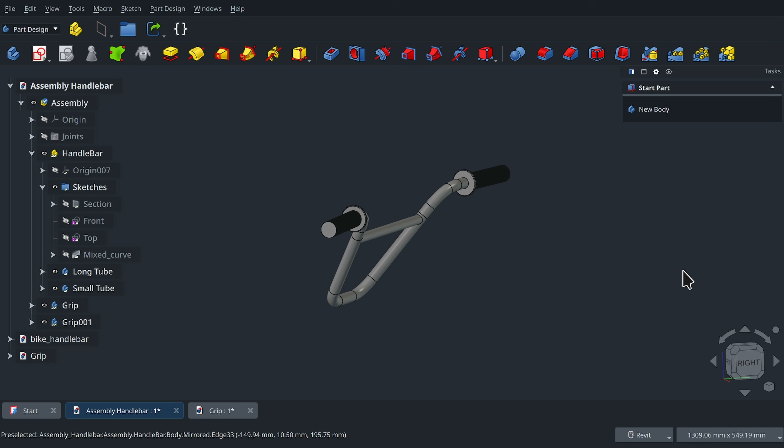In this video, I will show you how to make this bike handle and an easy assembly with the grips. At first glance, the modeling seems simple, but don't be fooled. It's actually more complex. I've made a short animation to show you why.

The main operation we're going to use is an additive pipe for the long tube and a pad extrusion for the center tube. The tricky part comes from defining the path for this operation. As you can see, the handlebar has a back sweep. This means the path doesn't lie on a single plane, which is what creates the challenge here.

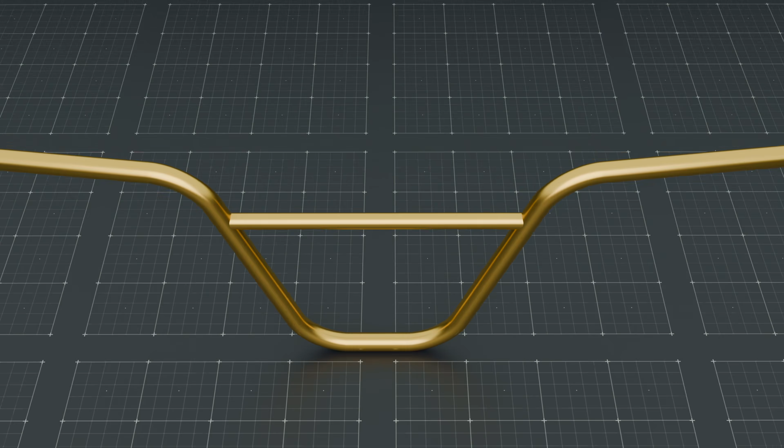I briefly mentioned this issue in one of my previous videos, but that video wasn't very informative and it went too fast to properly explain how to create this model. This time we're going to take the time to go through everything clearly, and I'll show you several different methods.

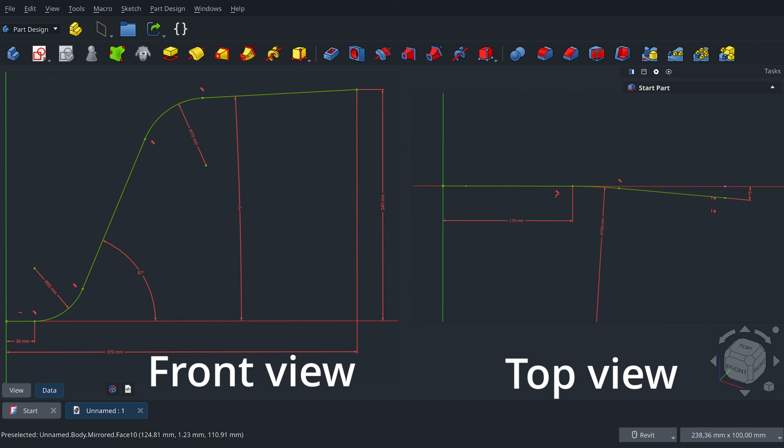The second sketch on the right corresponds to the top view, and it's what defines the back sweep. The goal here is to combine these two sketches to get a 3D path, almost like they had a baby together. To create this monstrosity, we're going to switch to the Sketcher workbench. To do that, go to the drop-down menu and select Sketcher.

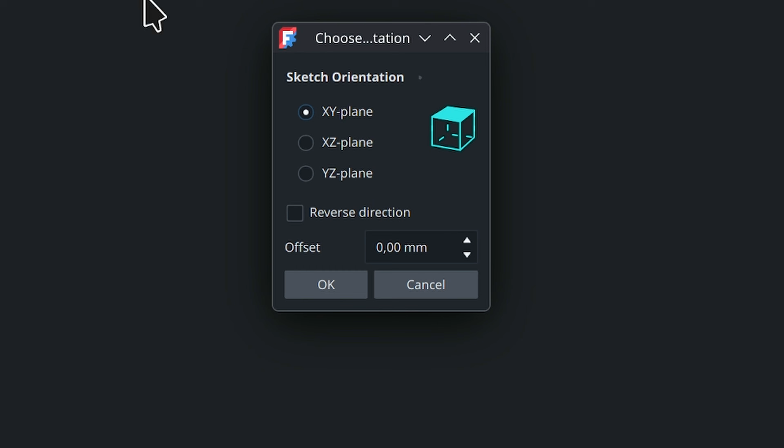We'll start by creating the sketch that represents the front view. To do that, click on the Create Sketch tool in the toolbar. In the pop-up window that appears, FreeCAD asks us to choose a sketch orientation. Since we want to create a front sketch, we can choose either the XZ plane or the YZ plane. The XY plane corresponds to a top view, which is definitely not what we want.

Here I'm going to select the XZ plane and then click OK to start sketching. The view automatically adjusts to place you perpendicular to the XZ plane to make sketching easier for you. To create our sketch, we're only going to use one tool, the polyline, which is extremely powerful. It's basically the Mewtwo of sketching tools. With it, we'll be able to create multiple segments with different shapes. Go ahead and select it from the toolbar.

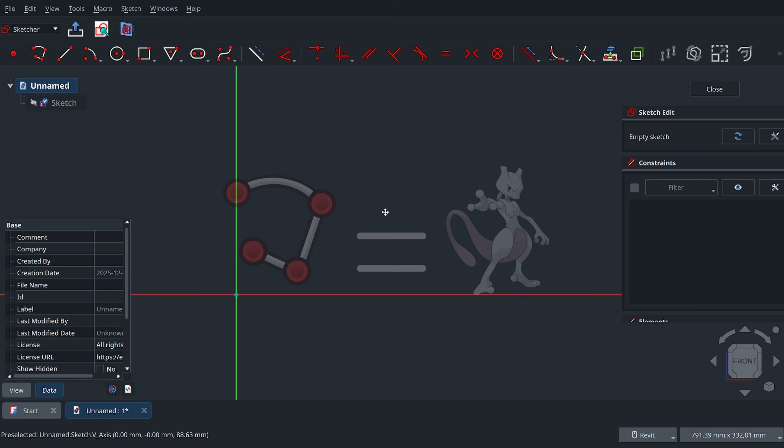Place the first point on the origin of the axis. You should see the coincidence constraint appear as a small cross. When it shows up, click to place the point. Then move to the right to draw a horizontal line. You should also see the horizontal constraint appear, and then place the second point.

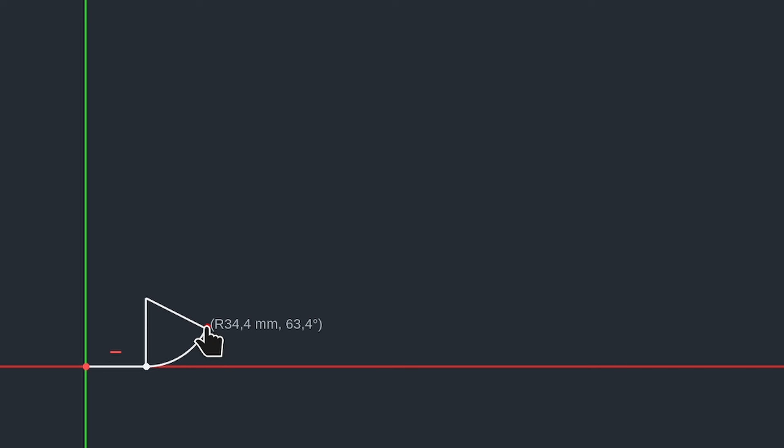On the sketch I showed you at the beginning, you can see that there's an arc in this area. To create it automatically using the polyline tool, we need to press the M key 3 times to switch to the arc mode. You can then place a third point. The great thing is that the tangency constraint is automatically created between the arc and the lines around it. Create a fourth point to finish the rising line.

At this intersection, we need to create another arc. If you paid attention the first time, this should be a piece of cake. Press the M key 3 times, then place the fifth point. Finally, finish the sketch by placing a sixth point anywhere you like. To stop using the tool, right-click or press Escape, otherwise you'll end up with a mama's boy that won't let go of the cord. Great, we have the shape, but it's not constrained at all.

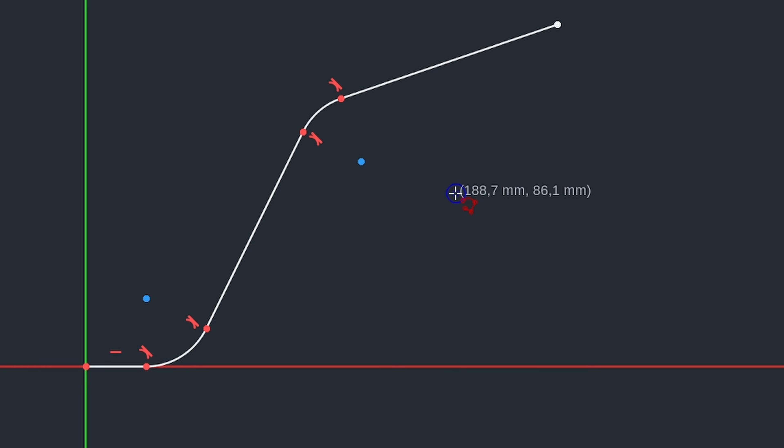To fix that, we're going to use the Dimension tool. By the way, doesn't this tool look like the big eye that the physics teachers draw on their diagrams to explain distance calculations? Or was I the only one traumatized by that?

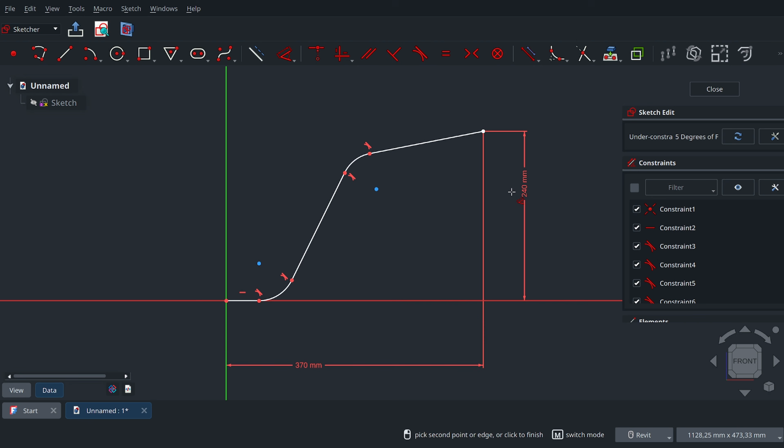Anyway, select the tool, then create a horizontal dimension between the rightmost point and the green axis, and set it to 370 millimeters. For the same point, also create a vertical dimension relative to the red axis, and set it to 240 millimeters. Now we're going to define the upsweep, which is the angle between the top straight line and the red axis. We'll set it to 3 degrees.

Don't mind the angle notation, it's trying to be fancy and went off to the other side of the map. Still using the Dimension tool, we'll set the radius of the top arc to 70 millimeters, and for the bottom arc, we'll set it to 55 millimeters.

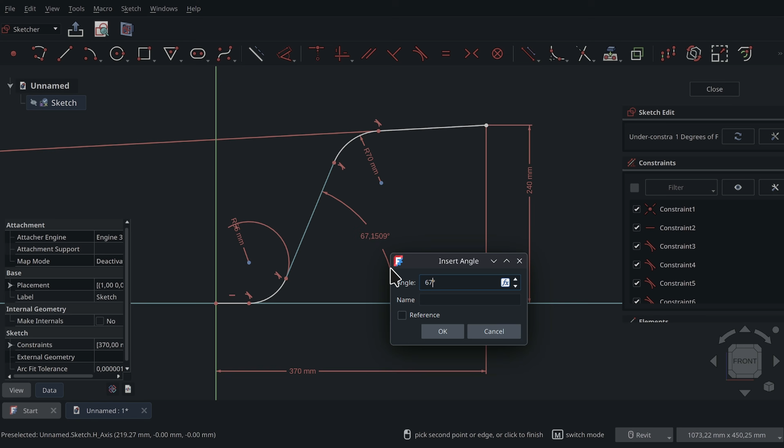Next, we'll set an angle between the straight line and the red axis and give it a value of 67 degrees. Then we'll finish by setting a horizontal dimension of 30 millimeters for the small line at the bottom. You can right-click to stop using the tool.

Now let's go find our dimension that ran away, just like Michael Scofield escaping from Prison Break, and bring it back closer to our sketch. Everything is green, which means our sketch is fully constrained. We can now exit it by clicking the Close button.

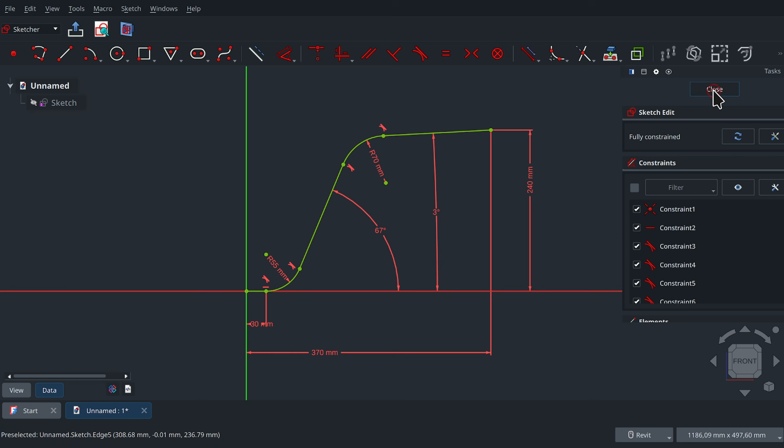Next, to keep our file organized, go to the tree view, select the sketch, and press F2 to rename it to Front. Now we'll create the second sketch, which is the top view. We'll use the same method. Start by clicking the Create a New Sketch tool in the toolbar.

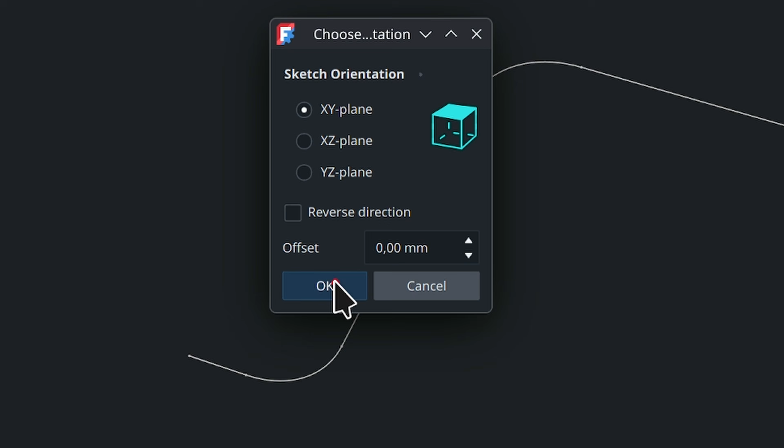This time, in the window that opens, keep the XY plane selected because we want our sketch on the top plane. Then click OK. Here we need to be very careful where we place our sketch, because it has to be perfectly aligned with the previous one. The starting point is easy to find since it matches the origin, but the ending point is not.

By default, FreeCAD turns on the Section View tool, which hides objects that might get in the way. But here we need to see the previous sketch, so click the Section View tool in the top menu to turn it off. You should now see the previous sketch in the viewport. Rotate the view a little and locate the point on the far right. We need it to constrain our sketch.

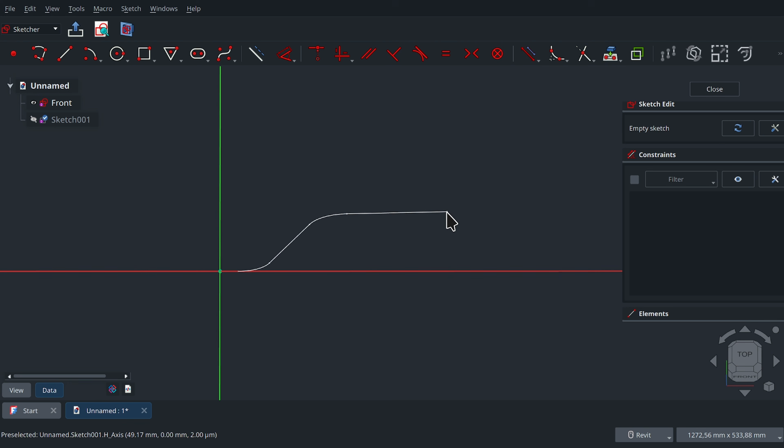To do that, select the Geometry Projection tool, then click the point on the far right of the previous sketch. You should now see a purple point on the red axis. That's the projected point. Next, realign the view by clicking top on the navigation cube, then click the Section View tool again to hide the previous sketch.

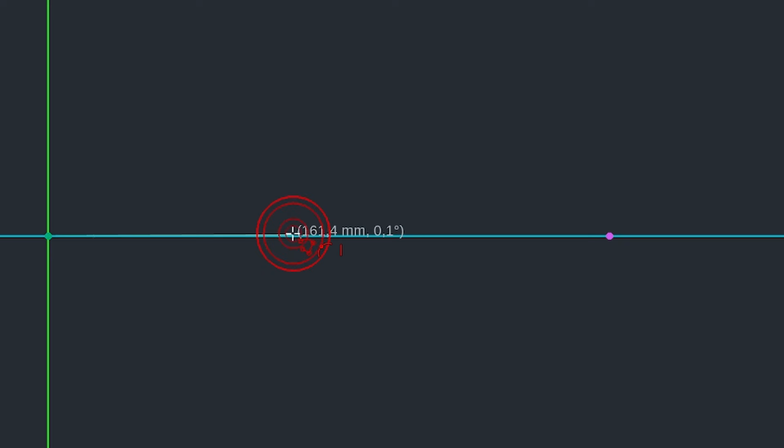Just like the previous one, we'll use the Polyline tool to draw our sketch. Start by clicking once on the origin. Then draw a horizontal line along the red axis and place a second point. I don't know if you remember, but there should be an arc here. Press M 3 times to activate the arc tool, then place the third point. Finally, create one last point below the purple point and right-click to stop using the tool.

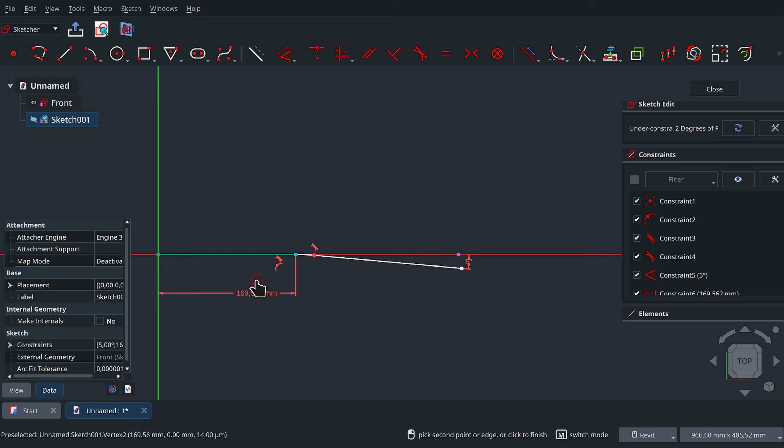Now let's constrain the sketch. Select the Dimension tool, create the back sweep angle between the red axis and the line on the right, and set it to 5 degrees. Next, set a horizontal length for the line on the far left and make it 170 mm. Still using the Dimension tool, set a radius of 700 mm for the arc.

The only thing left to fully constrain the sketch is to align the point on the far right with the purple point. Select both points, then use the Vertical Constraint tool to align them. This fully constrains the sketch, so we can now exit it. To keep the file organized, go to the Tree View and press F2 to rename the sketch to Top.

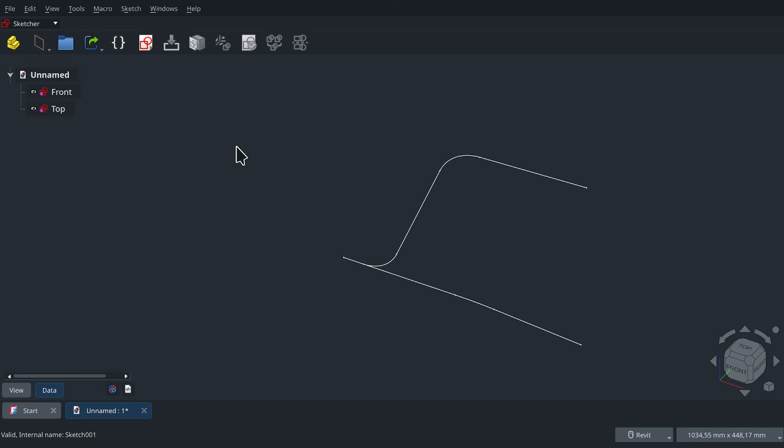Now we'll create our 3D path by combining the two sketches. I'll show you two methods so you can choose the one that works best for you. For the first method, we need to go to the Part workbench. To do this, select Part from the Workbench drop-down menu. Let's start by creating a new folder to group our sketches. This makes it easier to access them when used in operations, without having to expand all the operations to find the sketches. Select the two sketches, then drag and drop them into the new folder.

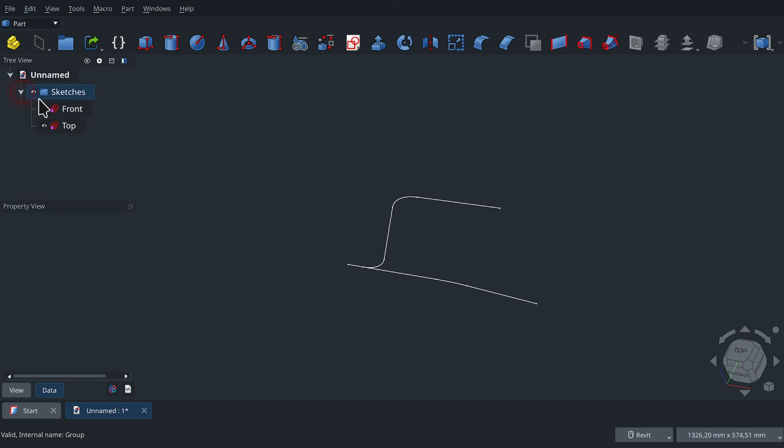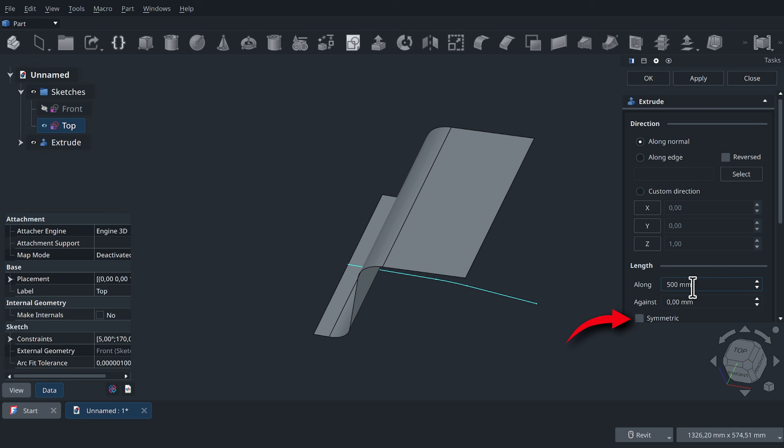To get the intersection between the two curves, we'll extrude each one along its sketch plane. Start by selecting the front sketch, then click the Extrude tool. In the window that opens on the right, set length along to a large value like 300, check the symmetric box and click OK to confirm. We'll do the exact same thing for the top sketch. Select it, then click the Extrude tool. In the menu on the right, enter a value of 500. Make sure Symmetric is checked and click OK to confirm.

The goal here is to get the intersection between the two surfaces to create our 3D path. And you'll see it's very simple. Hold Ctrl, select both extrudes, then click the Section tool in the toolbar. You should now see only the curve on the screen, and you can check that it properly combines both sketches. This method is really the basic way to get 3D sketches in FreeCAD. To keep my file organized, I'll move it into my Sketches folder.

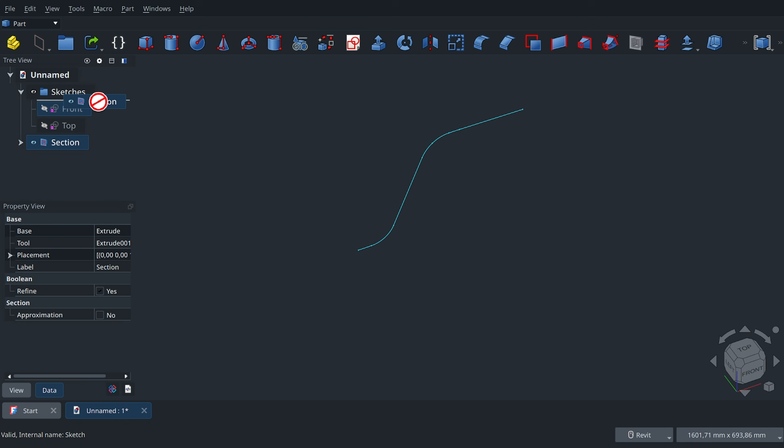Now I'll show you a second method, which I think is more elegant. And it requires fewer steps, because this is a bit like using a rock to hammer a nail with lots of steps, while a hammer would do the job much better. For this second method, we'll use an add-on that isn't installed by default in FreeCAD, and I think it should be. It's called the Curves Workbench. To install it, go to the Tools menu and click on Add-on Manager. In the search field, type Curve, then scroll down and click on Curves Workbench.

Then click Install. Close the window and FreeCAD will ask you to restart to install the workbench. You can click Restart Now. FreeCAD is so great that it asks us to save before restarting, which could have been disastrous if it had closed without saving. So choose a location to save your file, give it the original name like Bike Handlebar and click Save. FreeCAD will restart and bring you to the home page.

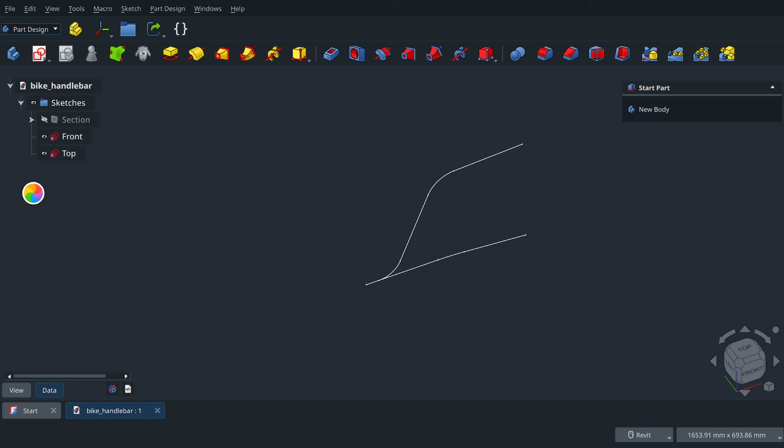You should see your file in Recent Files. Click on it to open. Now, when you open the Workbench drop-down menu, you should see the Curves Workbench. Click on it to access it. The tool we need here to project the sketches onto each other and get our 3D path is the Mixed Curve tool. To use it, hold Ctrl, select both sketches and then click the tool.

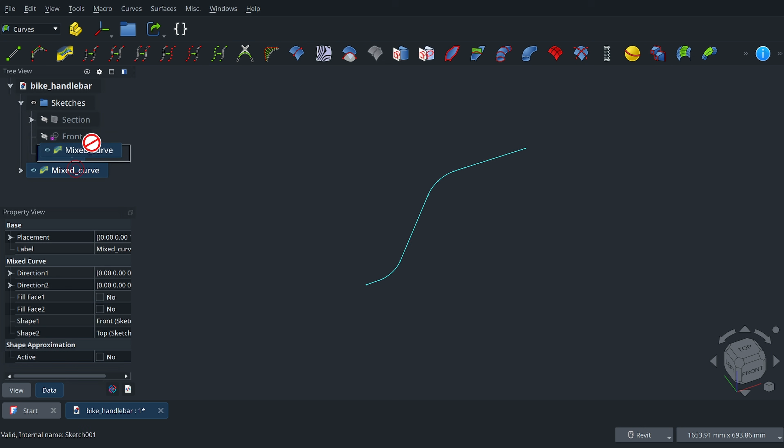In the viewport, you should see the mixed curve appear. It's the same result as the first method, but here we didn't need to extrude the sketches. In the Tree View, drag and drop the mixed curve into the Sketches folder to keep the file organized. We can rotate the view a little to see that this curve isn't on the same plane. You can also make the section from the first method visible to check that they match.

Both methods give good results, but I recommend using the second method, the mixed curve. It saves time and you don't need to use any extrusion operations. From here we can return to the classic modeling workflow by going to the Part Design workbench via the drop-down menu. In this workbench, we'll create the additive pipe. This operation consists of extruding a profile along a path. For now, we only have the path, so we'll draw the profile.

Here you can choose either the section or the mixed curve for the path to follow, it doesn't matter. I'll hide the mixed curve and make the section visible. Since we are creating a new solid, we first need to create a body. To do this, click the Create a New Body icon. With the F2 key, we can rename it to Long Tube. It will help to clearly identify the body.

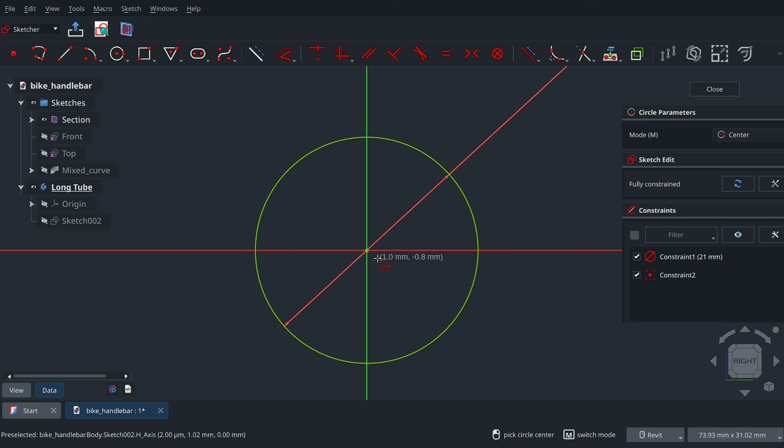Since we did things properly and our path starts at the origin, we can create the profile directly on the YZ plane. To do this, click the Create Sketch icon, then select the YZ plane in the viewport. The profile is very simple, it's just a circle with a thickness. To do this, use the Circle tool from the menu, create a circle exactly at the origin, and set its diameter to 21 mm. Still using the Circle tool, draw a concentric circle, that is with the same origin, and set its diameter to 17 mm. Then you can exit the sketch.

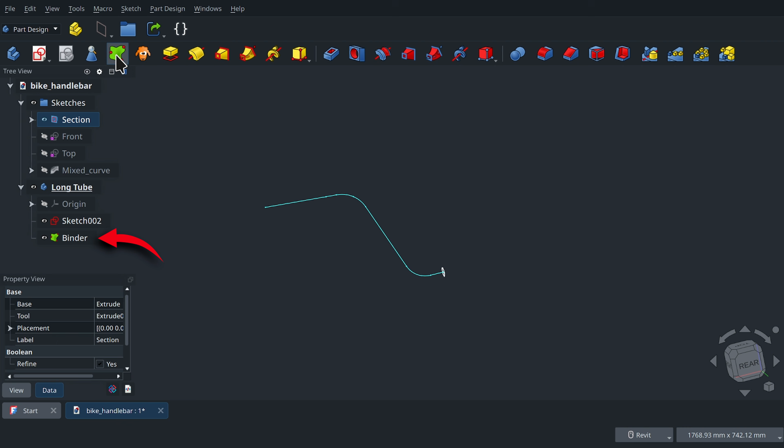Now we have all the ingredients to cook our delicious meal. However, the path isn't in our body, so we need to import it. For that, we'll use our good friend the binder. In the tree view, select the section object, then click the binder tool. You should now see the binder appear inside the long tube object. By hiding the section object, you should see the path in yellow in the viewport.

This is the binder. Now select Sketch 2 in the tree view, then click the Additive Pipe tool in the toolbar. In the menu on the right, under Path to sweep along, click Object and select the binder in the tree view. In the viewport, you should see the operation preview appear in green. Everything looks good, so we can confirm the operation by clicking OK.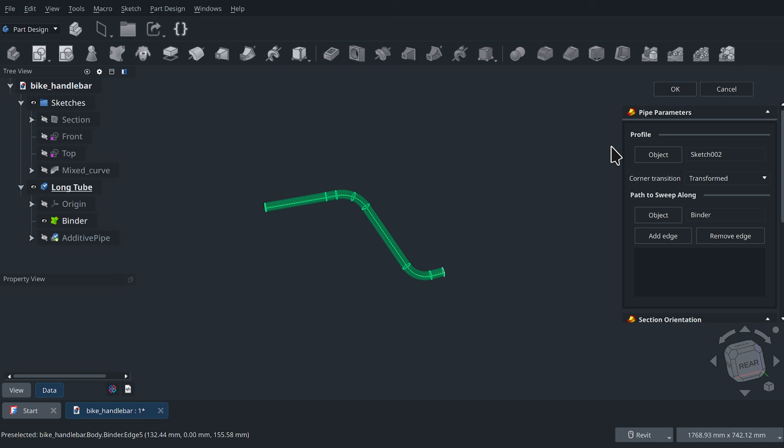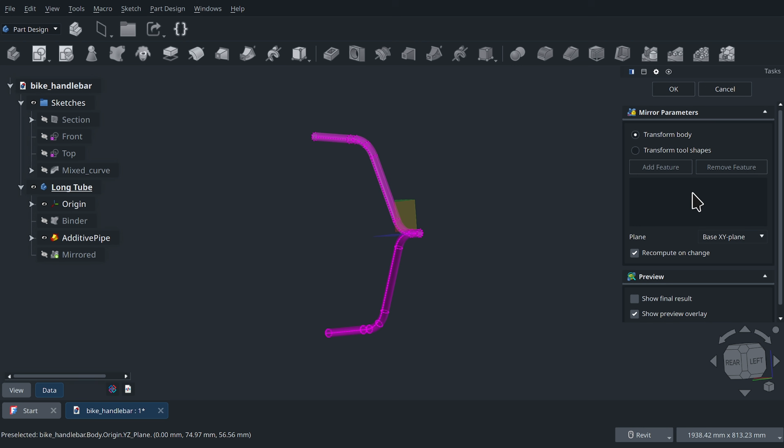For now, our handlebar doesn't look dashing because half is missing. To fix this, select our body in the tree view, then use the mirror tool to create the missing part. In the menu on the right, under the plane parameter, select the YZ plane. If you are confused, the easiest way is to look at the navigation cube to identify the axis. Blue for Z, green for Y, and red for X. So here we can see that the YZ plane is the correct choice. Super! Now our main tube is done.

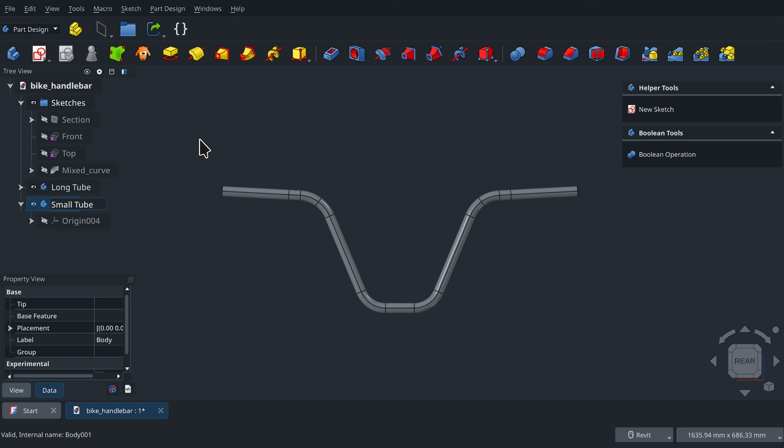Next we need to make the middle tube. Before that, let's rotate our tube a little to see that it's not all on the same plane. Looking from the top view, we can clearly see the back sweep, which is exactly what we want. To create the middle tube, we need to create a new body. To do this, click the Create a New Body icon in the toolbar. Press F2 to rename the body into Small Tube. Since it's just a straight tube, there's nothing complicated. We'll start by creating the tube's profile by clicking the Sketch icon, then choosing the YZ plane as the sketch plane.

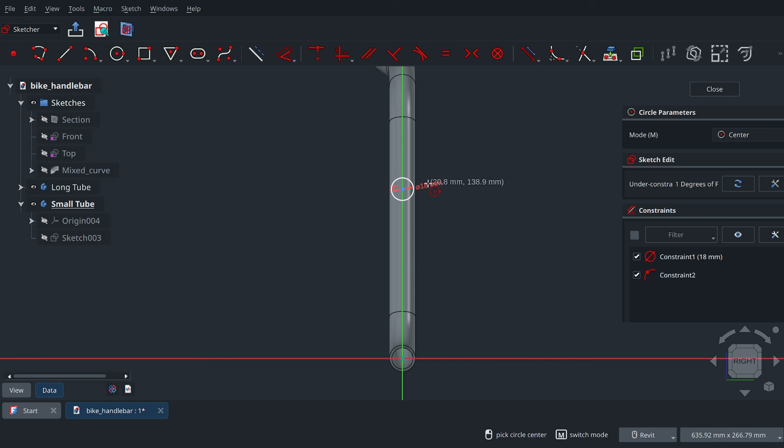Just like for the other tube, we'll use the Circle tool to draw the profile. Place the circle on the green axis and set its diameter to 18 mm. Then create a second concentric circle and set its diameter to 14 mm. Next, select the Dimension tool and set a vertical distance between the center of the circles and the red axis and give a value of 165 mm. Then you can exit the sketch.

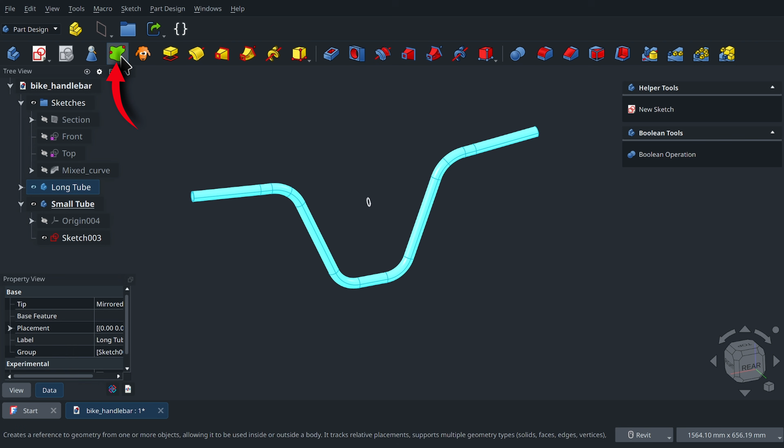The goal now is to extrude this small tube until it reaches the long tube. To do that, we need to import the long tube into the small one. Select the long tube in the tree view, then use the binder tool. You can then hide it, and you should see the binder appear in yellow in the viewport.

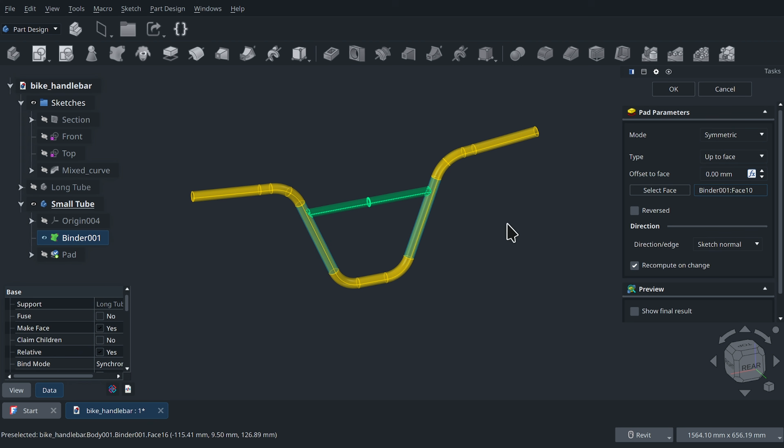Next, select Sketch 3, and in the menu on the right, click the Pad tool. In the type parameter, choose Up to Face, then click the left face of the binder. Right now it only creates half, so to make it symmetric, go to the Mode parameter and set it to Symmetric. You should now see in the viewport that the tube has been created correctly. In the tree view, you can then hide the binder and make the long tube visible again to get a full preview of the handlebar.

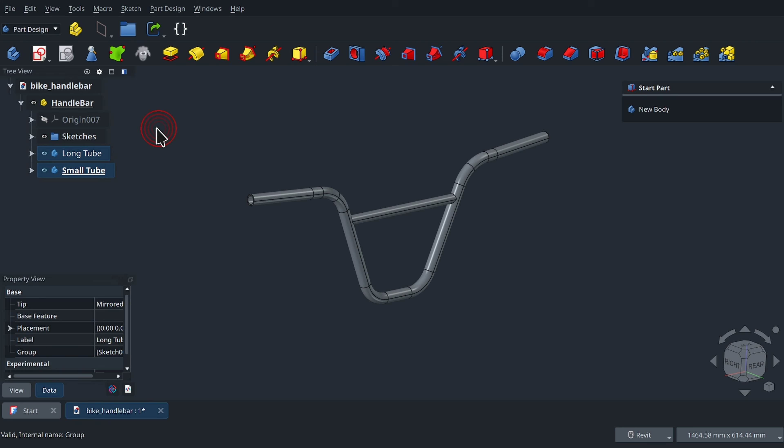If later we want to use this handlebar in an assembly, since it's made of two solids, we need to create a part object. To do this, click the New Part icon in the top toolbar. This object works like a container to store all our solids inside. You can press F2 to rename it handlebar, then just drag and drop all our objects into this container. Now you should have a clean and well-organized file ready to be used later in an assembly.

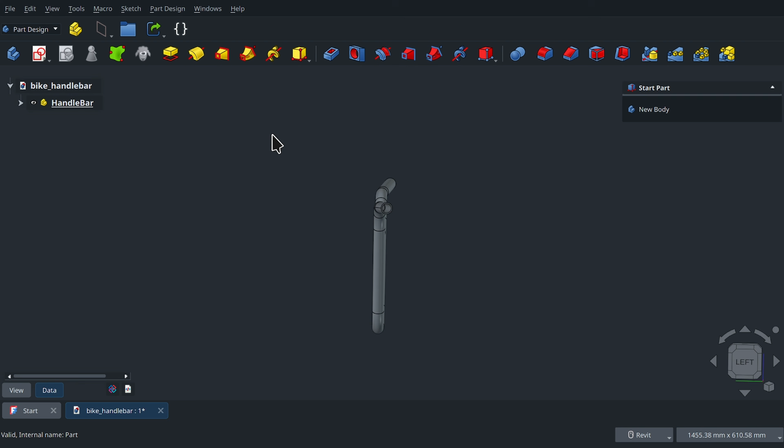Your support is priceless. As a little bonus, I'm going to show you how to create grips and assemble them on the handlebar, so you really get your money's worth. To do this, we'll create a new file. Go to File menu, then click New Document. These grips won't exactly break 3 legs on a duck, as we say in France, but at least they will exist. Making them will be very simple, just a simple revolution followed by an array.

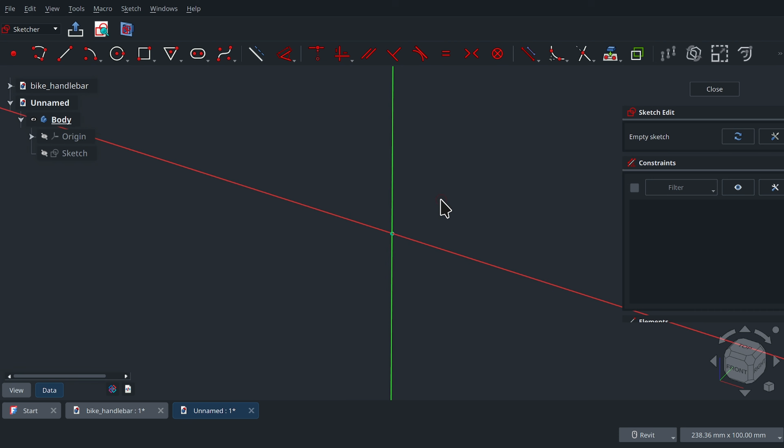To start, create a new sketch and choose the XZ plane as the sketch plane. The goal is to recreate this sketch, nothing too fancy. To do this, we'll use the heavy artillery, the polyline tool. I want to speed up the drawing a bit. We're just recreating the shape with straight lines, so make sure to add horizontal and vertical constraints. You can slow down the video if needed using the player options.

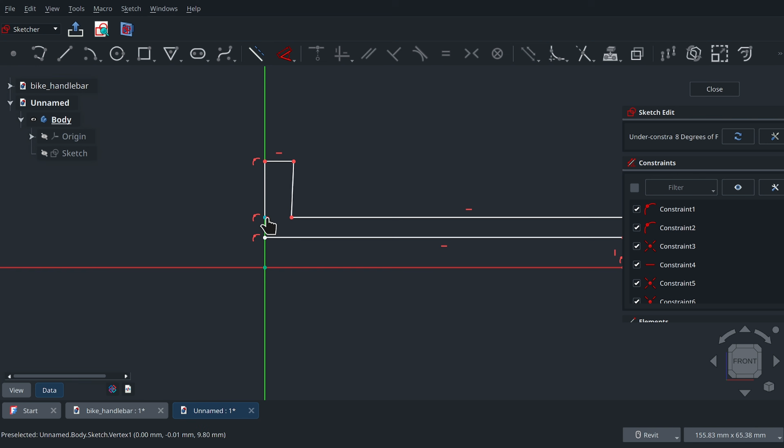But at this point in the video, those of you who are still watching are the cream of the crop, so I don't think the drawing will be too difficult, especially if you've made it this far.

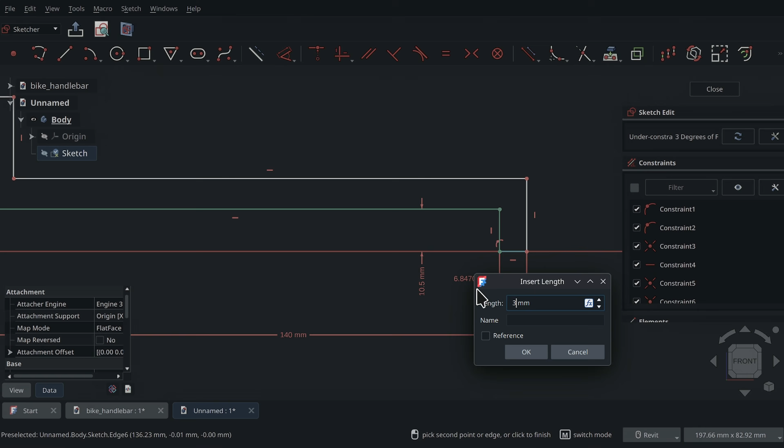To constrain the sketch, we'll use the Dimension tool. Start by setting a horizontal value for the point on the far right and give a dimension of 140 mm. Then, for the small vertical line inside, set the value to half the diameter of the handlebar tube, which is 10.5 mm. Next, set a thickness of 3 mm for the grip at the right end. Also set 3 mm thickness between the two long lines. On the left, set a thickness of 5 mm. For the highest point on the left, set a height of 25 mm. You can then exit the sketch.

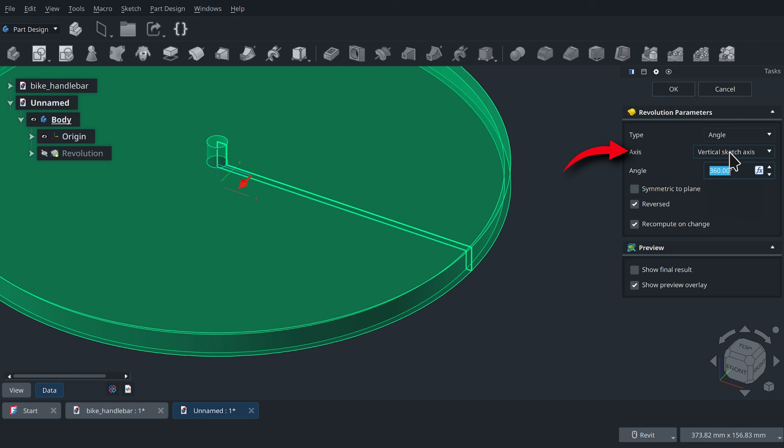To make the revolution, click the Revolve tool in the menu on the right. By default, FreeCAD revolves along the Z-axis, which is completely wrong in our case. Here go to Axis and choose the base X-axis as the axis of revolution, then click OK to confirm. We now have the basic shape of our grip. We'll add fillets on the two right edges. Hold Ctrl, select the two edges, then click the Fillet tool on the right. You can leave the fillet size at 1 mm, then click OK to confirm.

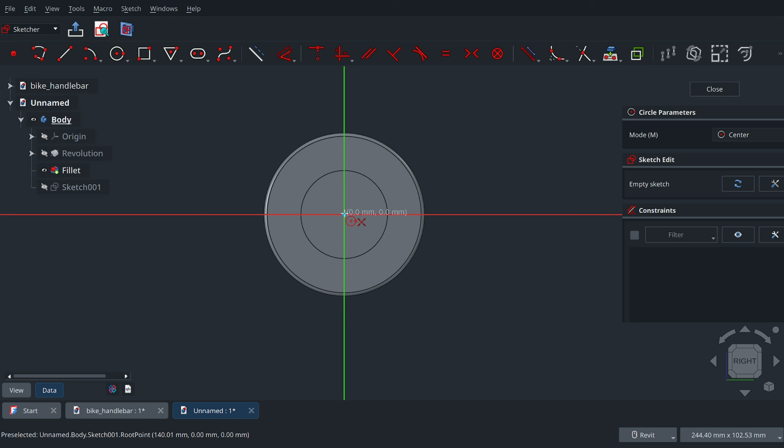Now we'll create the small ribs. To do this, create a sketch on the extreme face of the grip. Select the face, then click the Sketch tool. Using the Circle tool, draw a circle with its center at the origin and set its diameter to 31 mm. If we leave the sketch like this, it would fill the inner hole, which is not what we want. To fix this, use the Projection tool to project the inner circle. The projected circle appears as a construction line.

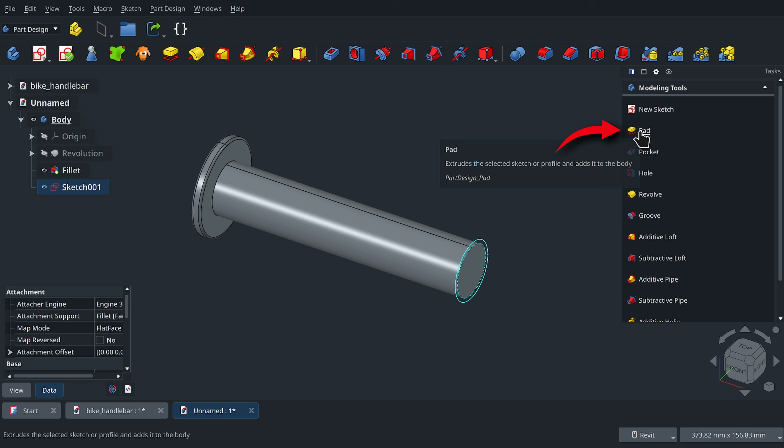Select it, then use the Construction tool to convert it into a solid line. With Sketch 1 selected, use the Pad tool in the menu on the right. In the parameters, check the reverse box so the operation goes in the right direction. Set the length to 2 mm, then click OK to confirm the operation.

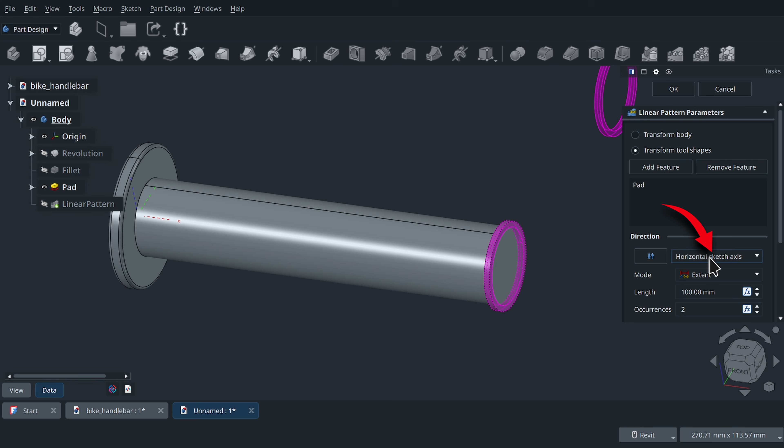Now we'll create an array of this extrusion. In the tree view, select the pad operation, then click the linear pattern tool. In the menu on the right, change the direction to follow the base X-axis. Click the arrows to reverse the array direction. Then set the length to 135 mm.

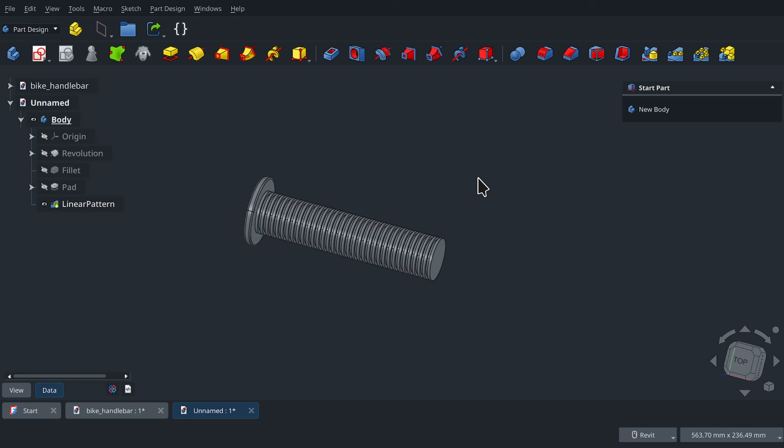We can see that the last rib is misplaced, so subtract 2 mm to place it correctly. Next, set the number of occurrences to 35. You can then confirm the creation by clicking OK. We've finished modeling the grip. To keep our work organized and clear, press F2 to rename the body and call it grip.

To be able to use this grip in an assembly, we need to save it. So hit Ctrl S, give your file a name and save it. Now we'll work on the assembly. We could have created the parts and the assembly in the same file, but since these are parts I might use in other assemblies, I've separated the parts into different files. We'll do the same for the assembly.

To start, go to the File menu, then create a new document. To create the assembly, we'll go to the drop-down menu and then click on Assembly. Next, we need to click on the new assembly icon to activate the workbench. To import new parts into the assembly, go to the right-hand menu and then click on Component.

The order in which you import your parts is very important. The first part you import can be fixed, meaning it won't be able to move. In our case, it's a static assembly, so it doesn't matter much. I still recommend importing the main part that won't move first. In our case, that's the handlebar.

When you import the first part, FreeCAD will ask you to save your file, so go ahead and do it. Name your file Assembly. In my case, I'm going to overwrite the previous file I created to prepare the tutorial. FreeCAD will now ask if you want to ground the first part. In our case, we'll answer yes because we want our handlebar to be fixed.

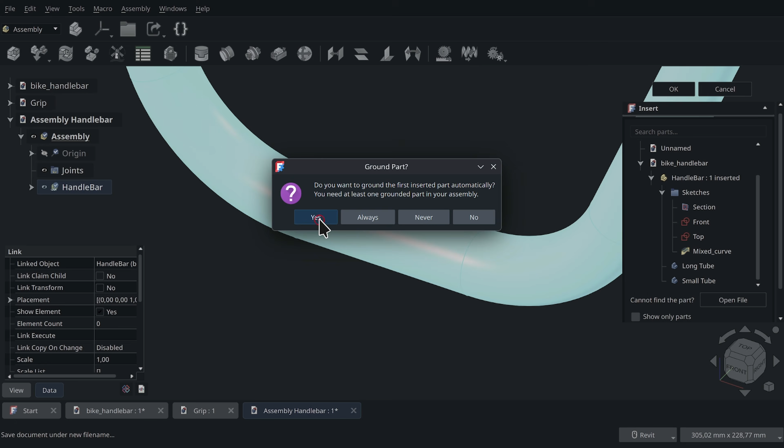Next, we'll go back to the right-hand menu, scroll to the top of the list and click on the body grip. With the gizmo, we can move it upward to get a better view of the model. And finally, we can click OK to complete the import. The goal now is to attach the inner face of the grip to the outer face of the handlebar. To do this, we'll use the most basic joint, which will fix the grip in both translation and rotation.

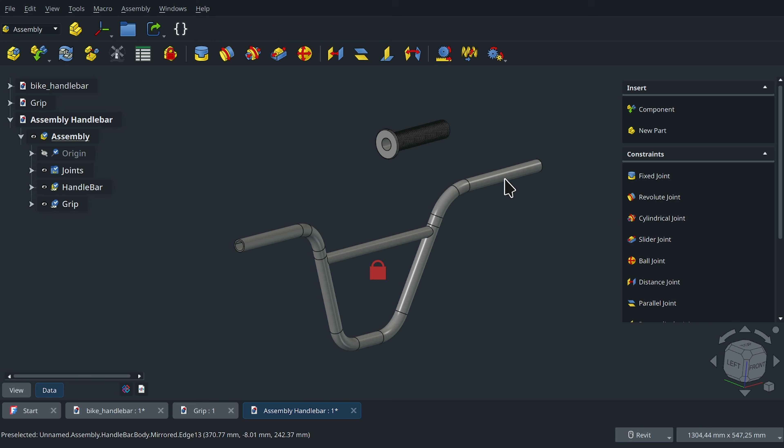Click on the Fixed Joint icon in the toolbar. In the viewport, select the innermost face of the grip and then the outermost face of the handlebar. It's crucial that the gizmos are oriented the same way. Once you've selected the faces, the grip should automatically move into the correct position on the handlebar. You can then click OK to confirm the placement.

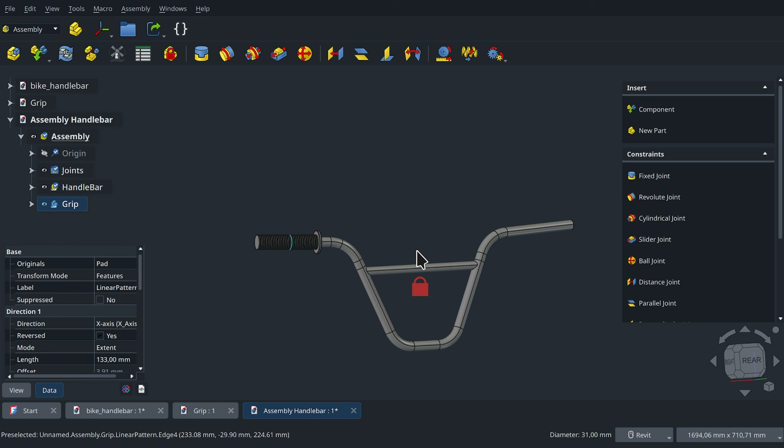Since this is a dynamic assembly, we can go to the tree view, open the handlebar part, go into the Sketch folder and double-click on Sketch Front to edit it. Here we'll change the value 370 to 380 mm, then close the sketch. In the viewport, we can see that the grip's position has updated automatically without any errors.

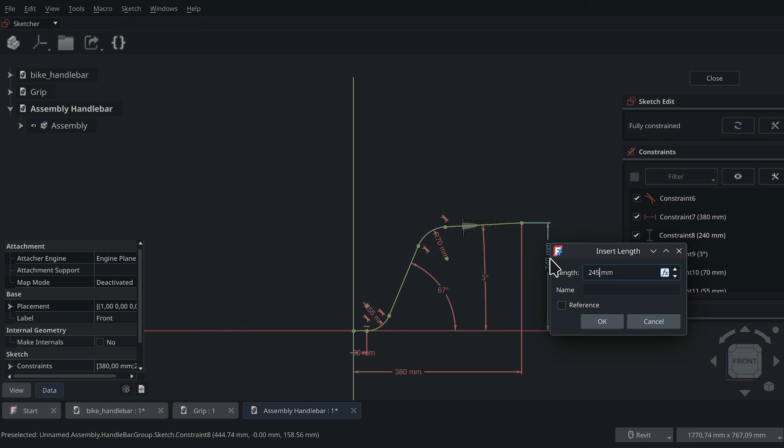We can also go back to Sketch Front and change the value 240 to 245, for example. And after exiting the sketch, we'll see that it updates correctly. Now we'll take care of the second grip. Unfortunately, there isn't a symmetry or array function yet in the assembly workbench, so we have to do exactly the same thing to constrain the second grip, like the cavemen we are.

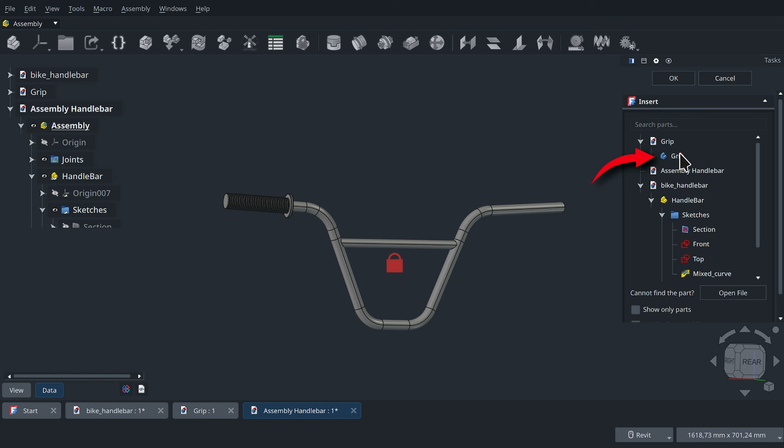So, in the toolbar, click on the component icon. In the right-hand menu, click on Grip, use the gizmo to move the part upward, and then click OK to confirm. Next, while holding Ctrl, select the inner face of the grip and then the outermost face of the handlebar, and then click on the fixed joint icon.

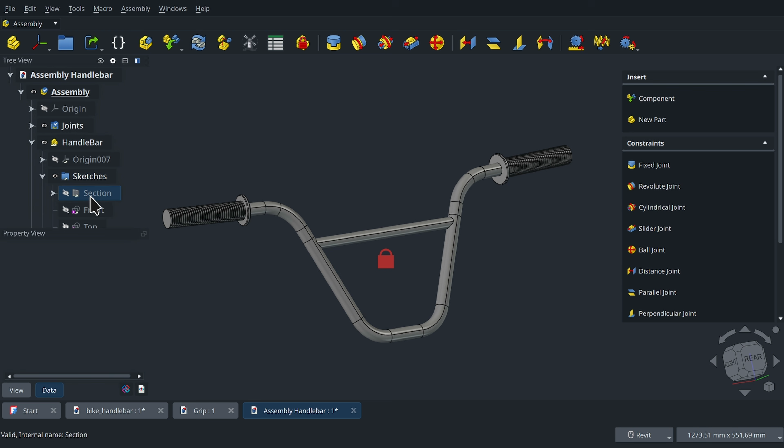We can see that the grip has been placed upside down. To fix this, go to the right-hand menu and click on the two blue arrows to flip the part, then click OK to confirm. We've now finished assembling the grips onto the handlebar. You can have some fun by going back into the front sketches of the handlebar and changing the values to see if the model reacts dynamically. Normally, you shouldn't encounter any issues.